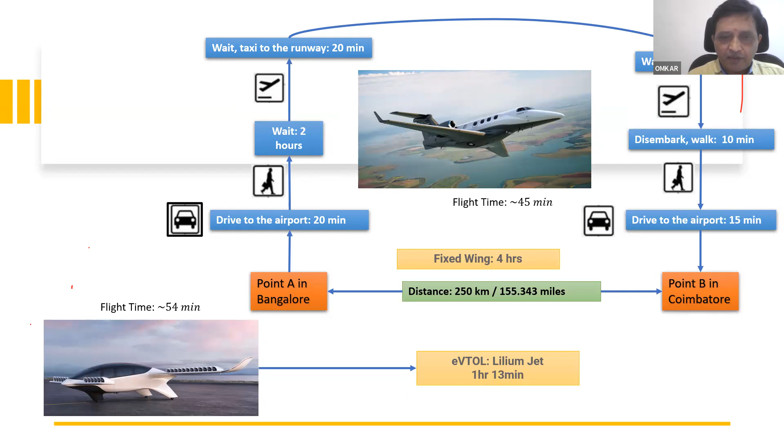Okay, no? 1 second. Yes. It is.

So if you look at the organ transplantation scenario in India, worldwide it is of course there, but even considering India, nearly 50,000 people are in need of heart transplant, about 3 lakh for kidney transplant, and more than 1 lakh waiting for liver and corneal transplants. One existing methodology is to create green corridors, which in the absence of any other alternate is the only way. They create these to cater to things in the golden hours.

It is very essential that you have a corridor like this, but considering the situations in the city, it is not always easy to do this, even creating green corridors. In fact, when we were discussing with one of the doctors, I forgot the name, but when they were carrying even in a road ambulance a heart transplant, the ambulance traveling in a green corridor with zero traffic hit against a divider, and they had a lot of problems. So anyway, road transport is really not all that easy.

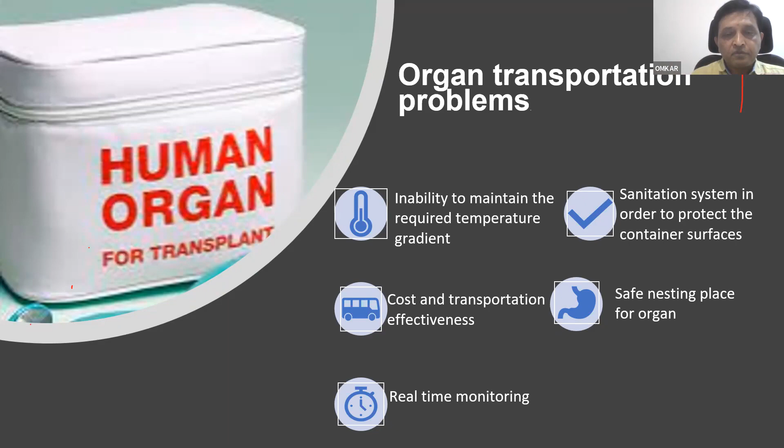So we studied some of the things - at 4 to 8 degrees, metabolism slows down but still persists. Below 2 degrees centigrade, it increases the risk of cold injury, causing protein mutations etc. So that is also a problem.

About 12 degrees centigrade is another type of problem where the metabolic demand for oxygen leads to some irreversible hypoxic injury, and it can impede the organ. So there is a need to maintain the temperature between 4 to 8 degrees centigrade.

So we need to design such a chamber where we can maintain the temperature and monitor in real time. Which means when the eVTOL is going, let us say for 100 or 200 kilometers, we need to really look at how to have a continuous monitoring system.

So the maximum weight of this box would be something like about 20 kgs, including the organ, be it liver or heart generally. This means that your eVTOL payload should be about 20 kg plus maybe other things like a camera etc. So about 25 kg payload.

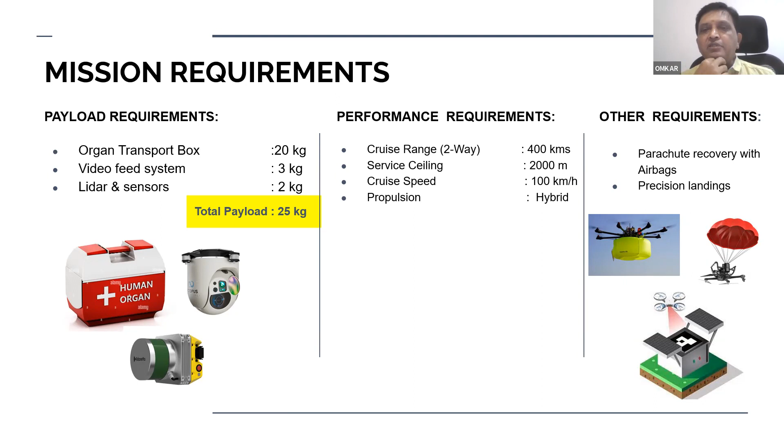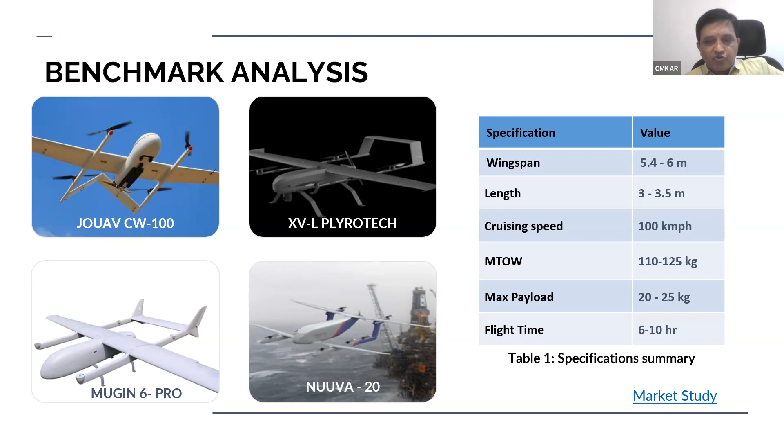So we started with some benchmark analysis for this kind of payload and this category of VTOL. We studied various designs - representatively we have put 4 different configurations that are considered. The right side table gives us the specification summary - wingspan approximately ranging from about 5 to 6 meters, length about 3 to 3.5 meters, cruise speed of about 100 kmph, and MTOW of about 110 to 125, and similarly flight time. So this is our starting point.

Then the design methodology - first we went with the design requirements, then the mission profile and analysis, then configuration selection, then we went with the conceptual design, initial weight estimation considering the constraint analysis, then component sizing, and we did the low fidelity aerodynamics and performance calculations.

Then we did the detailed design and high fidelity aerodynamics, followed by stability and control analysis, structural analysis, and final weight estimation. Of course, we all know this is an iterative process. Once we converge, we create a prototype and take it to the manufacturing stage.

Looking at the conceptual design, we have design requirements based on mission performance, stability, etc. Then the primary VTOL configuration layout: we select the multi-rotor frame, class and type, wing configuration, tail configuration, propulsion type, generate views, and optimize the configuration. Once you do this iterative process, you get to the optimized configuration.

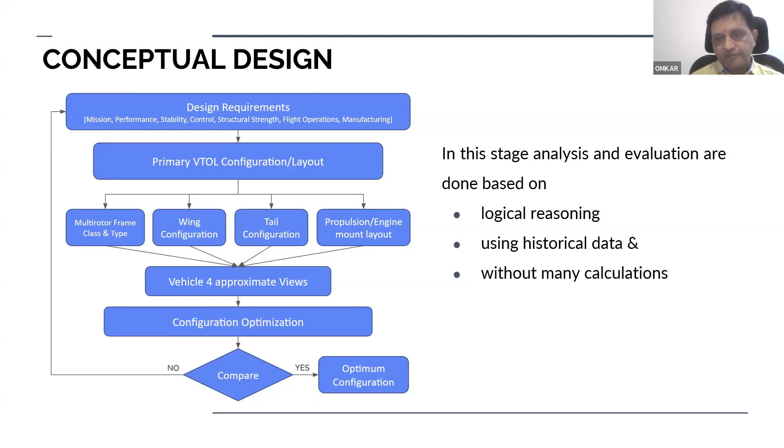So when we did that, this is what we get. As you can see, this is sort of an X configuration, with four rotors for vertical takeoff and lift, and a pusher configuration for lift and cruise.

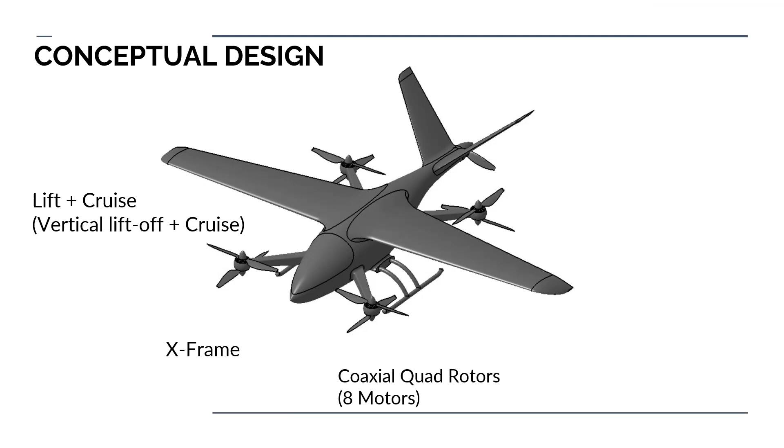Then we used the X frame and this coaxial eight, because we know that by using coaxial we lose easily about 25% of the performance, but we want to save since most of the time it's a cruise vehicle. We want to save on drag from the additional rotors, etc. Therefore, we stuck to this configuration.

If you look at the rotors, we used a high wing sailplane kind of design for better gliding abilities, and an IC engine pusher so that there is no interference from the main propeller onto any of these things.

You can see there is a staggered arrangement in the front two propellers versus the hind propellers. We did some studies to decide upon how much stagger and vertical differential we need to provide for these things.

We chose a standard V-tail design. This, especially in these kinds of VTOLs, will help us provide better directional stability. We have done a lot of parametric studies also on this V-tail angle, etc.

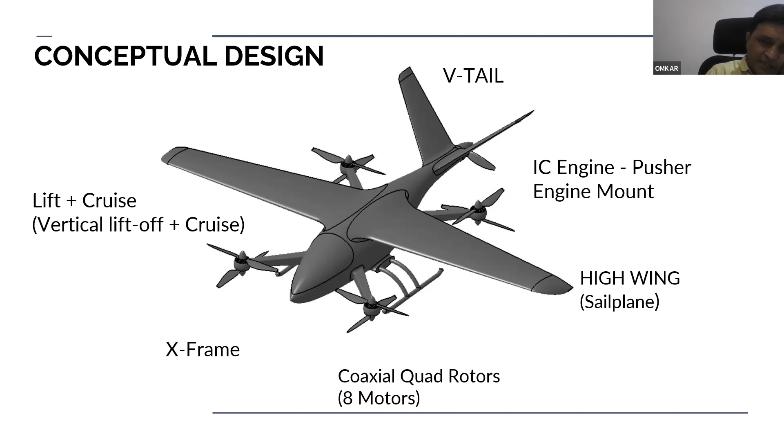Most of this cruise is handled by the gasoline engine or IC engine. For the preliminary design, I'll not spend much detail because we have a very learned audience. If it is too preliminary, please excuse.

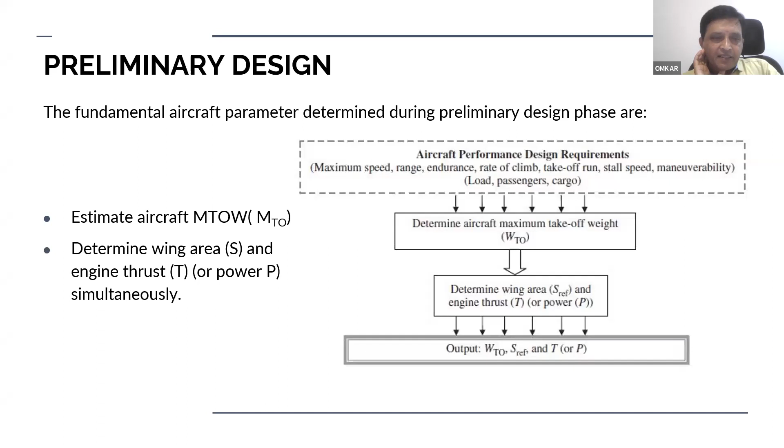Fundamentally, in the preliminary design phase, based on aircraft performance design requirements, we estimated the MTOW, maximum takeoff weight, determined the wing area, engine thrust, and power. So we did all that.

Then maximum takeoff weight estimation is done considering all the structural weight, subsystems, and avionics. Some of these things, of course, are taken from the design handbook as empirical calculations. That's how we arrived at the size.

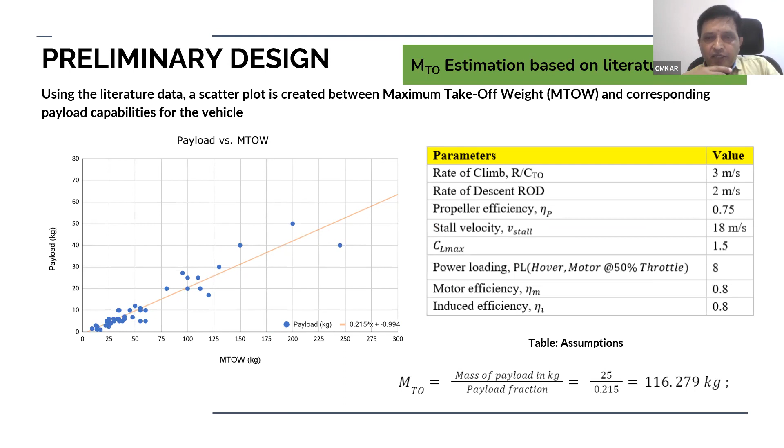So you can look at this scatter plot of MTOW against payload for various other configurations, and you see that regression line. We also fit into this, and that's how we chose the maximum takeoff weight to be around 120 kgs. You can see other values of rate of climb and descent in the table.

So this is how we started. Then battery weight estimation: we had to get to this, for takeoff, hover, transition from VTOL to forward, some forward to VTOL, then VTOL landing. These are computed, and you get the mass of the battery to be approximately 13 kgs.

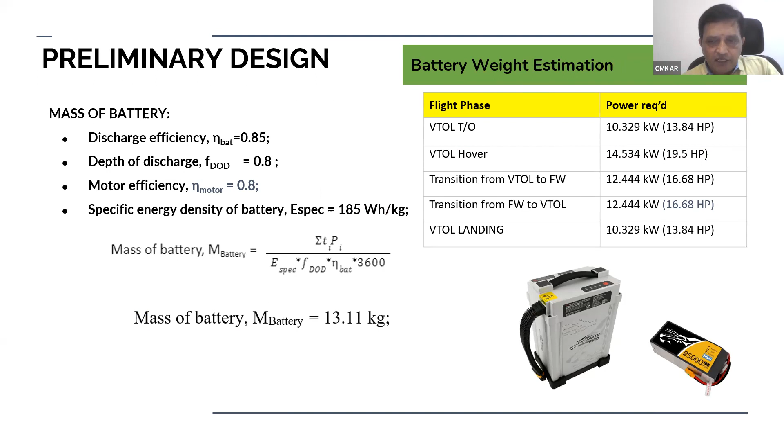Then for fuel weight estimation, we used the standard textbook algorithms or approach, and computed the fuel weight estimation. The mass comes to about 8.5 kgs.

The structural mass estimation we have done using standard design books. We referenced Gundlach, which says less than 20%, but that's for a fixed wing. Here we have other accessories like rotor mounts, etc., so we took it to be about 30% of MTOW.

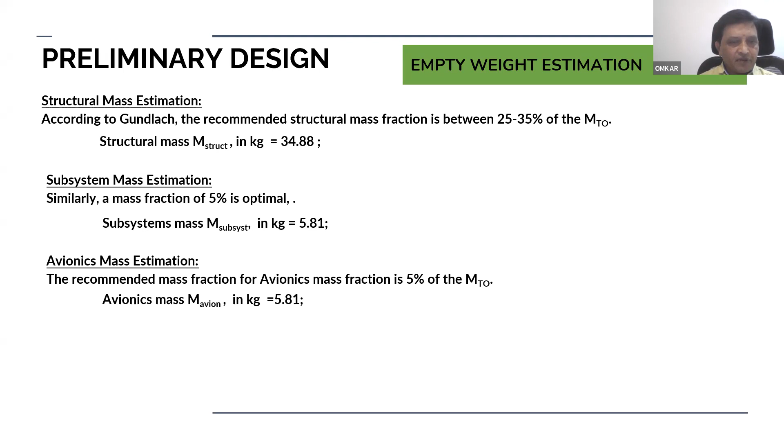So we get the structural mass, then the subsystem mass, then avionics mass. These are all standard things that we have taken.

When it comes to the propulsion system, the VTOL propulsion system uses motors which are T-Motor U-15 II, weighing about 1.74 kg, along with the electronic speed controller and matching propellers as given here. So we have the weight.

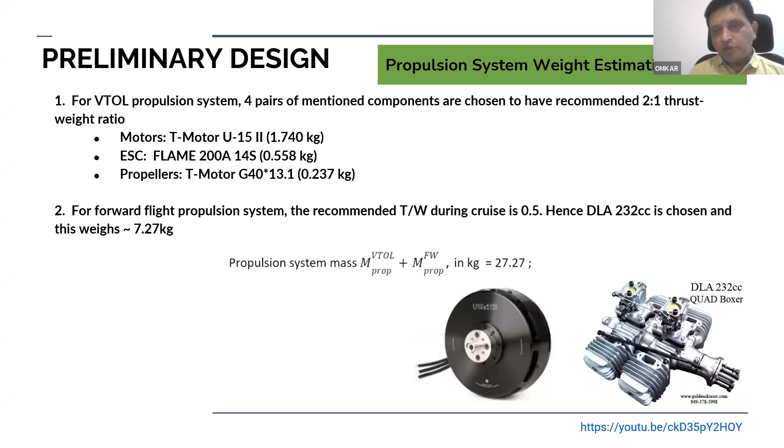Then for forward propulsion, since we need a thrust-to-weight ratio during cruise of about 0.5, we chose a DLA 232cc engine weighing about 7.27 kg. The propulsion system mass sums up to about 28 kgs approximately.

The total weight, now we compute from all we have done, and MTOW will be about 126 kgs, and whatever we started with our initial assumption, it matches.

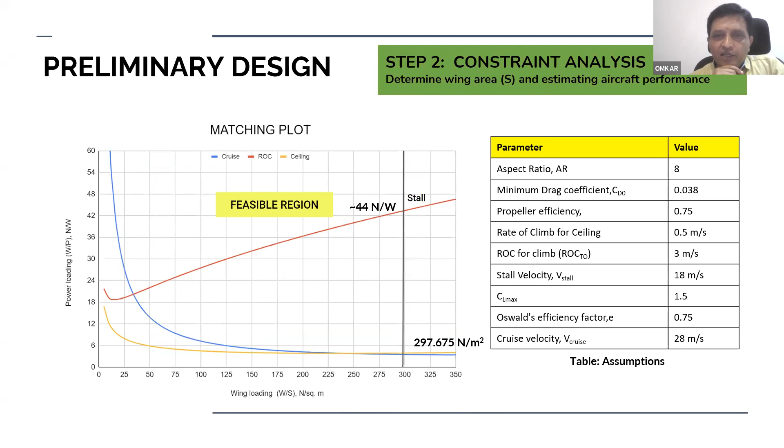So this is the constraint analysis to find out the feasible region of operation. As you can see, the power loading is about 44 newtons, and the wing loading is approximately 300 newton per meter square. On the right side, you also see some standard assumptions that we have made.

So this is the matching plot, and we arrive at the component sizing: cruise velocity of about 100 kilometer per hour, aspect ratio of 8, fuselage length to span ratio 0.6, fineness ratio about 4.5, and wing taper ratio also taken to be about 0.4.

So this is overall how the wing looks. There is a sweep, because the basic calculations are also given. Sweep is very slight, about 2 degrees, taper ratio of about 0.4.

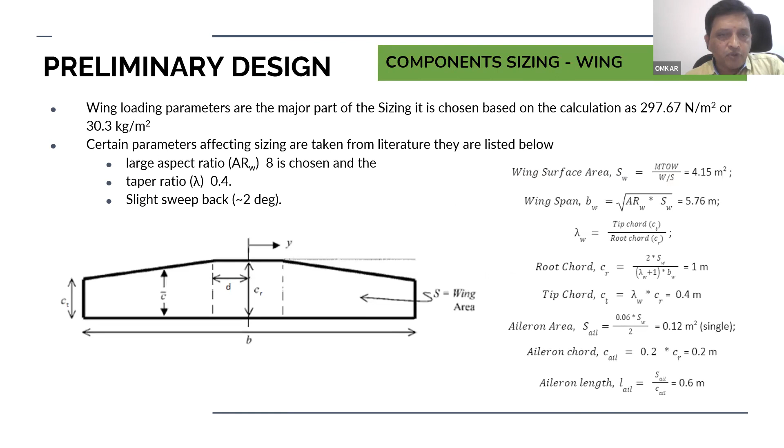And for the fuselage, from the literature, fuselage is 40 to 60% of the wingspan. So we started from there, and using the fineness ratio as shown in the last table, we arrive at fuselage length of about 3.46 meter and diameter about 0.77 meters.

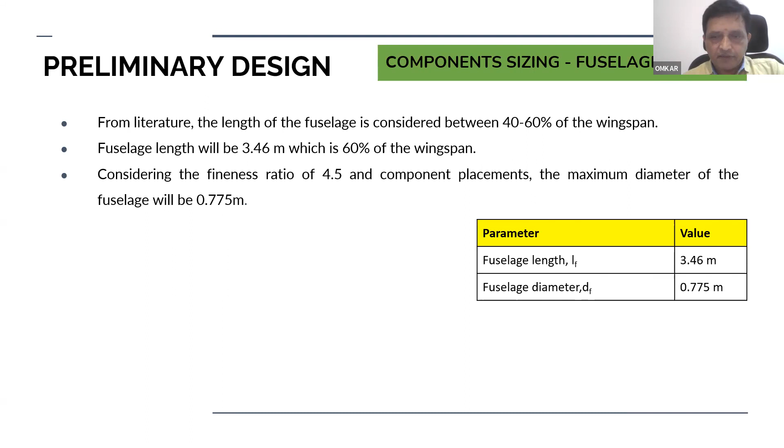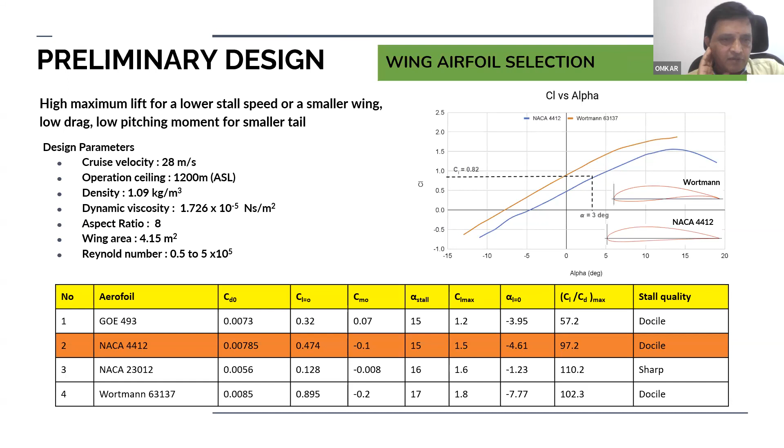Then the wing aerofoil selection - we studied, as any designer would do, a variety of aerofoils, and we converged to NACA 4412 because that satisfied all the requirements that we had. Its stall quality is also docile, not sharp, so that was another added advantage, and we decided to go with that aerofoil.

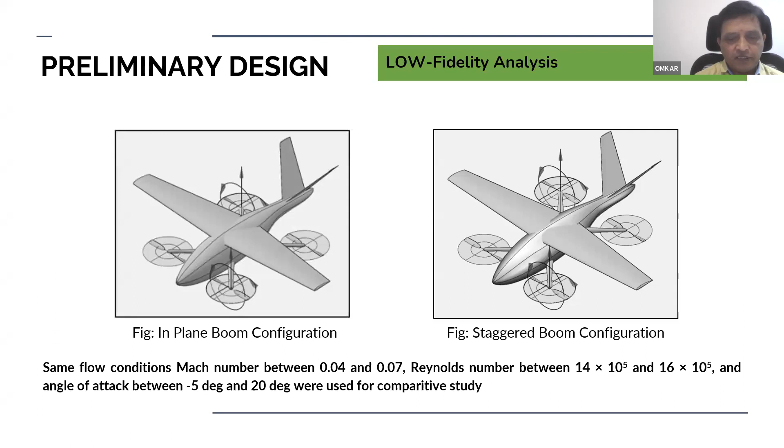As you can see in the in-plane left-hand side picture, there's strong interference between the front and rear rotors, whereas for the stagger, even at an angle of attack of about 5 degrees, 10 degrees, we have seen no appreciable interference. So we thought it is good to have staggered boom locations.

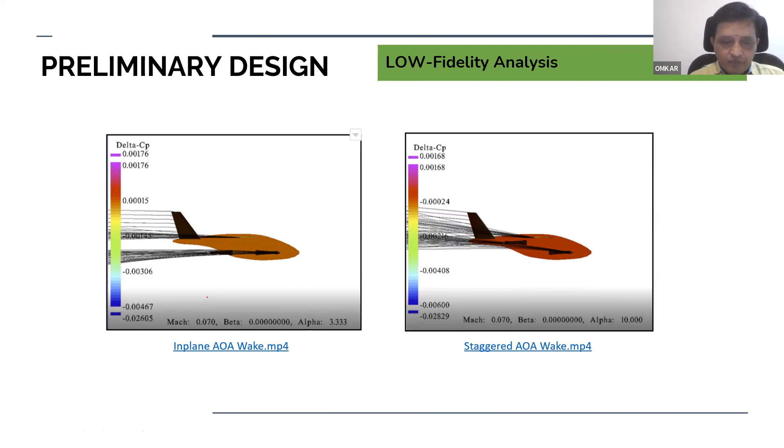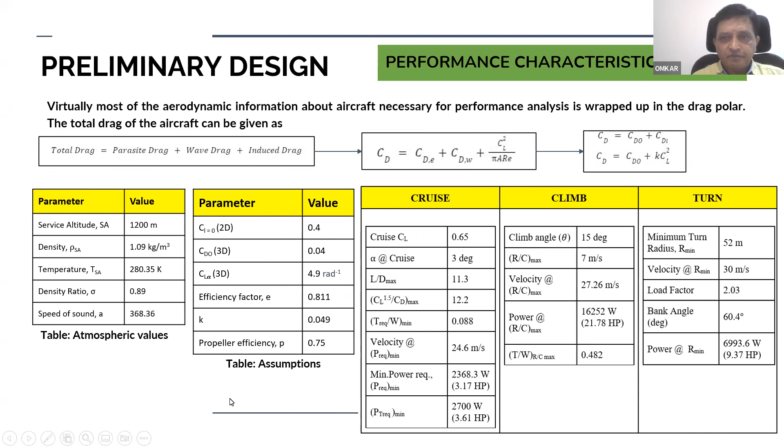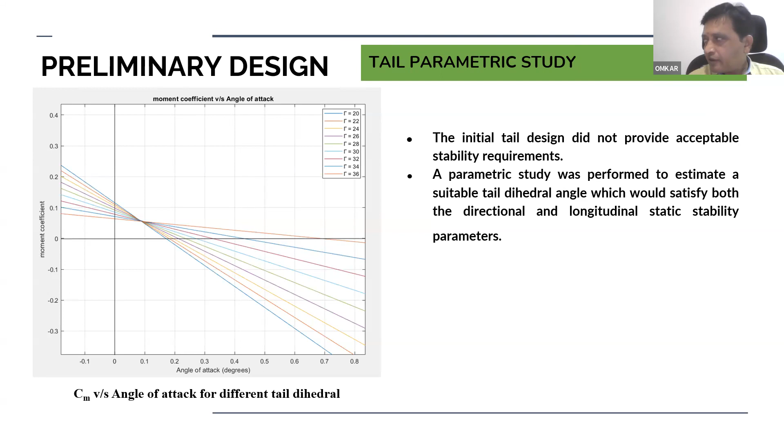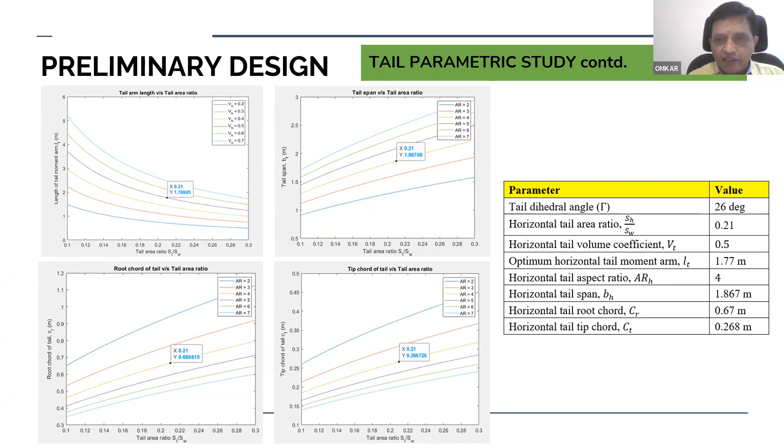So some more on the parametric studies - I will not go into the details of these things. We have done all these studies to arrive at the optimal configuration for the tail.

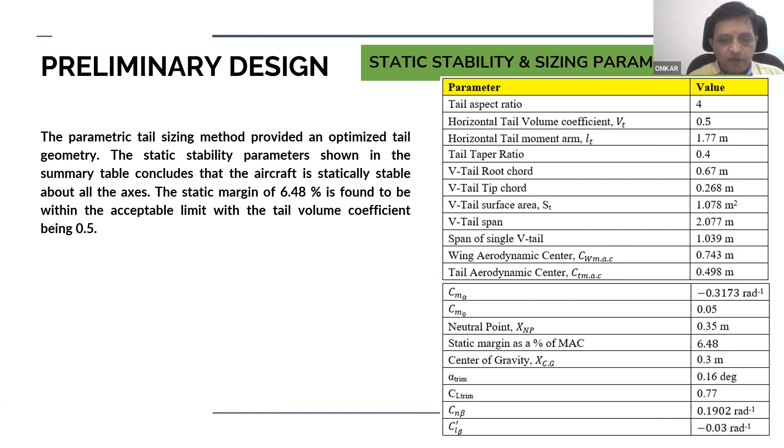Now coming to the propulsion system for the vertical flight, we chose T-motor, and total thrust is about 216 kg.

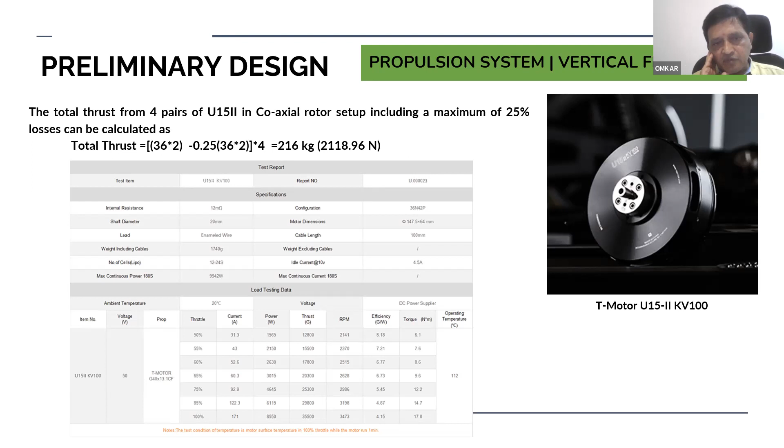Some of the other parameters are there in the table. Then when it comes to the forward flight, we have the...

IC, that is the SP275TS ROS engine. It's a two-cylinder gas engine, 275 cc. We did use that, and we are aware that there could be some issues with the vibrations. So we also designed a vibration isolator.

This isolator's weight is not much, it's about less than a kg.

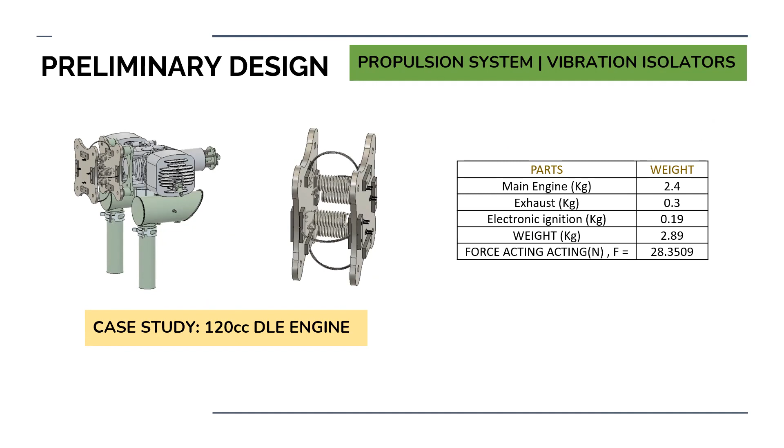So this isolator, we have done some studies. I don't have those results here, but it minimizes the vibrations to a great extent. This is essential for the type of problem we are trying to solve.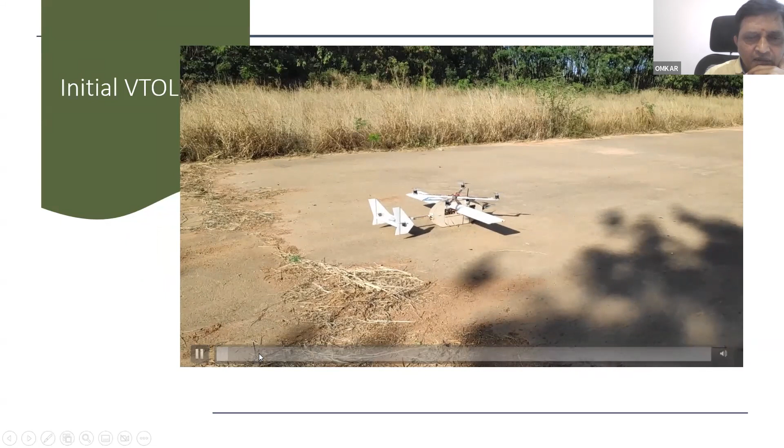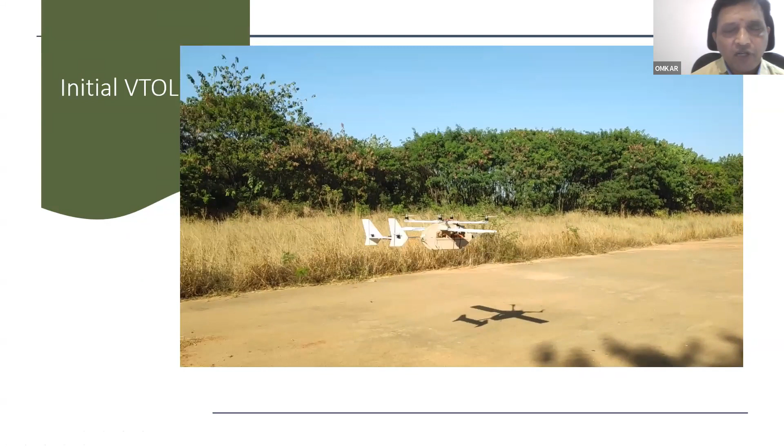This is our AAC airfield. Now the airfield we have almost lost, the airfield almost gone. So that's the transition.

Well, one of the advantages with this sort of vehicles is that the control things are quite easy and straightforward compared to the...

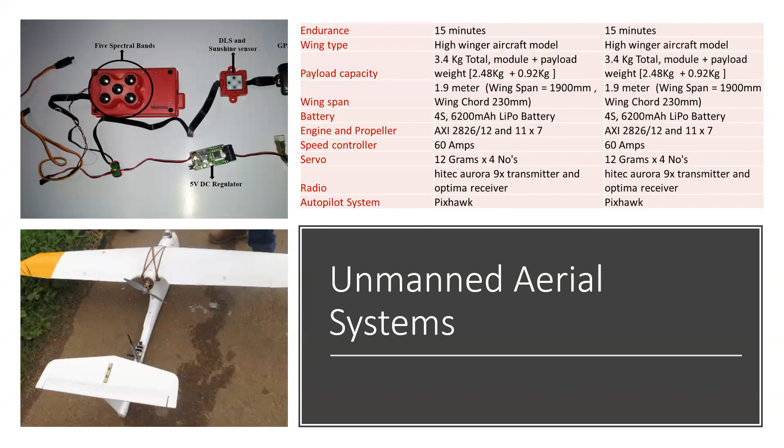Especially for paddy, health and yield. There is some background noise. Someone is, I think, he has to mute. Kindly mute your system.

Okay, so for agricultural applications, we have used the multispectral camera, which has 5 channels, and we have done this study in Kerala for more than 2,000 acres of paddy, all in the Palakkad area. You do the waypoint navigation, everything, do the flight plan, go there and fly, get the data. These are the 5 bands - you get RGB and NIR and red edge, and through that you can compute various indices.

One of the things that we did was to compute NDVI indices, and we recognized that NDVI in one place was less than 0.5, which means it's a diseased crop, and it was verified through ground truth to be so. And then we have done work on the yield prediction of tomatoes.

We used several techniques. First, we started with this image taken from a drone, and then we need to estimate the yield. Initially, we used self-organizing feature maps. Later, we developed into the object detection techniques of ML.

Now you see the tomato can be picked up as an object. The number of boxes is equal to the number of tomatoes, and the size of the box is proportional to the size of the tomato. You also have the RGB information, which means you can grade the tomato and calculate its yield.

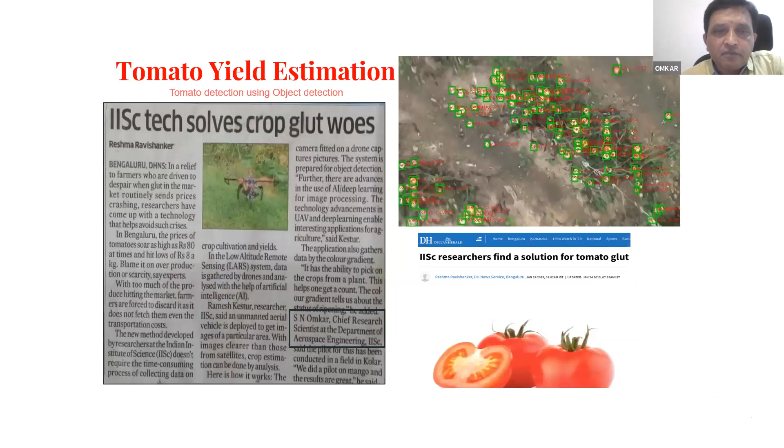And of course, the tree crown. If you want to extract the nature of the tree, what species it is, that can easily be done. We have used all types of data, this is IISc tree cover.

Then we have created our own mango network with a huge database, where just like tomato, we can pick up all the mangoes. You can see there are boxes around the mango in this picture.

Then we were the pioneers, myself and Professor K.P. Reddy, to use UAVs for afforestation. The conventional method we all know, so we actually did our first experiments about 7-8 years back in the Gauribidanur area, and we created an aircraft especially to carry seeds. It can carry about 10 kg of seeds with an appropriate dropping mechanism. You can also carry different varieties of seeds and drop them, whatever seed, wherever you want.

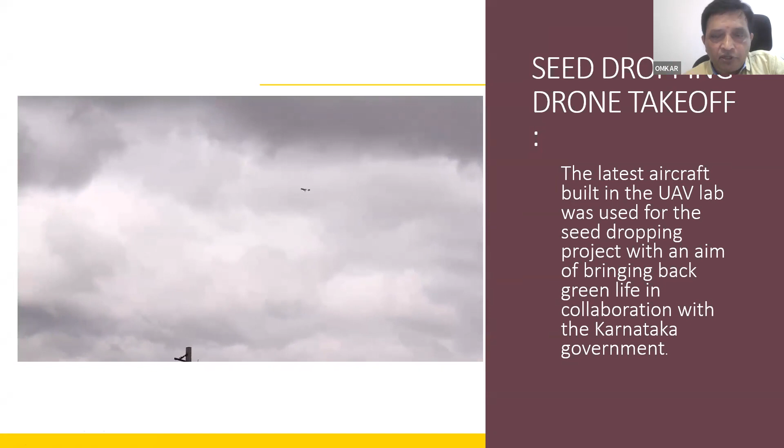The whole idea is that you can use waypoint navigation and fly in the same area, maybe once in 3 months or 6 months, so that you can know what is the impact of seed dropping on the local ecology.

Then we have done something on pomegranate, one of the recent studies we have done. You can compute the height and the canopy diameter, and through that you can compute the yield. We have compared this for a place near Chitradurga, and you can find out what is the average yield, etc.

Then one of the important works we have done is detection of violence using drone imagery. We presented this at the CVPR conference, a leading conference in image processing, and it gave us a lot of publicity too. The whole idea is that today any mob activities, wherever a huge mob is present, you can fly drones to monitor them.

Drone feeds can come in, but the whole point is when there is a violence activity or any sort of thing like protests or chain snatching, can you automatically detect and flag that at this lat-long location there is a problem. That's the whole idea. So we developed a three-step architecture using machine learning techniques.

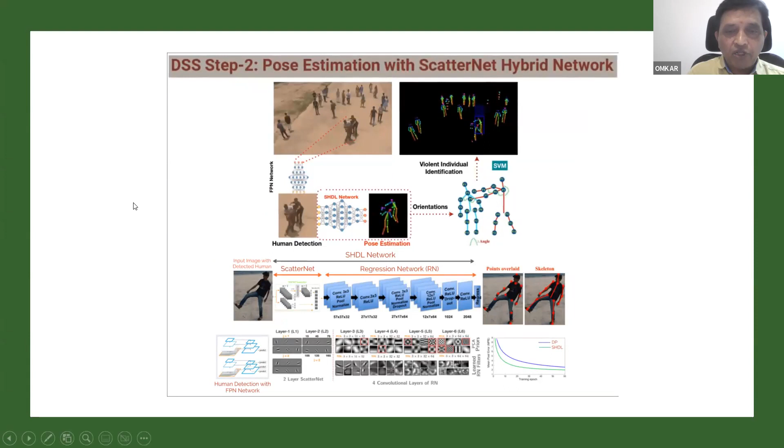So first is human detection, then pose estimation, how the people are engaged, what kind of pose they are in. That is the architecture you can see here, a regression network, which tells what kind of pose they are in. Then the orientation between the key points of whoever is engaged in the pose, so that you can classify and identify whether it is violent or not.

Multiple violence activities can also be identified in this algorithm. You can see multiple things being picked up in one go, and this can be flagged. This actually attracted the media also, and BBC interviewed us.

Just let me play it for a minute, because this is one of the small things that I use for boosting our lab. This is my student who is now in the US.

Then of course flood is a perennial problem we have, and it is important to detect the number of people who are trapped in any situation, including captives, because we have seen in many places, when rescue teams went recently, they took a boat which can carry 8 people, and when they went there, there were 80 people. So there was a lot of commotion about who has to get in, etc., and they could not plan properly.

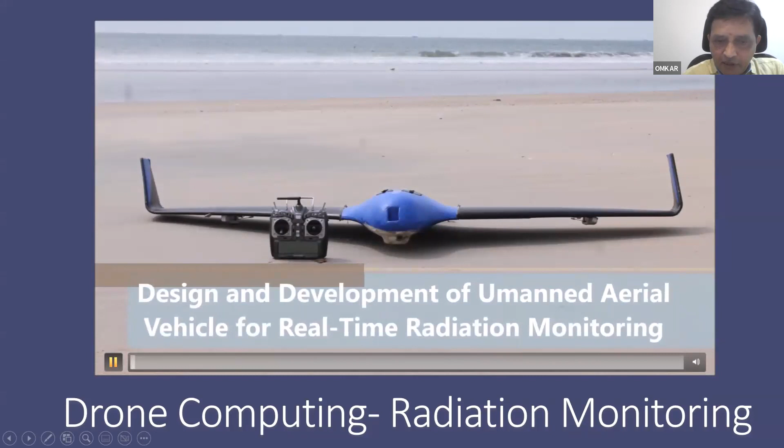So here is a small clip which will capture the work we have done with regard to radiation monitoring. These are some of the historical things that went wrong.

This should be over in another couple of minutes, so bear with me. Yes.

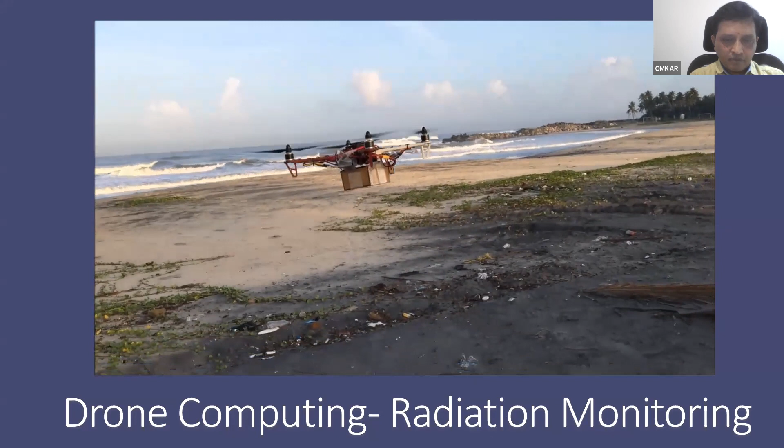So we went to Chavara Coast. First, we mounted this on a quadcopter because we need to look at how the instrument itself performs. This is the sensor board. So we did some variation in the altitude, etc., just to check and verify that we are able to get acceptable results.

Then we wanted to do the large area scanning, so there's the bungee launch. We went with the fixed wing architecture, and all around is the sea. You can see the waypoint navigation, where all it has to fly. And then when it lands, it has to be very smooth, it does a belly landing.

Yeah, so that's how we did it. And you get the real-time data, counts per minute and the lat-long locations. This is the onboard GoPro video. So you can get a heat map of how the radiation can go.

Yes, this is one of our experiences. Sometimes things can go wrong. When we were doing this, our team lost communication. So this is after we recovered. The post analysis, all around sea, they thought it must have dived into the sea. I'll show you the onboard video. We thought we had lost about 6 lakhs.

Kerala being the land of gods, God smiled on us. So here is the onboard video. We thought it had gone into water, but look, it just hit a coconut tree and nothing happened to our aircraft or the equipment. Some savior came and took it, and our students had to search for about 7 hours, and this was about 11 kilometers away. And that's how we actually recovered.

So now we have a system which can monitor the radiation levels.

Many other analytics we have done, but I thought I'll just include a few basic things. So this is what we see, that you have to use this on any kind of drone along with cloud and big data and AI to make it more meaningful. Jai Bharat, so I conclude.

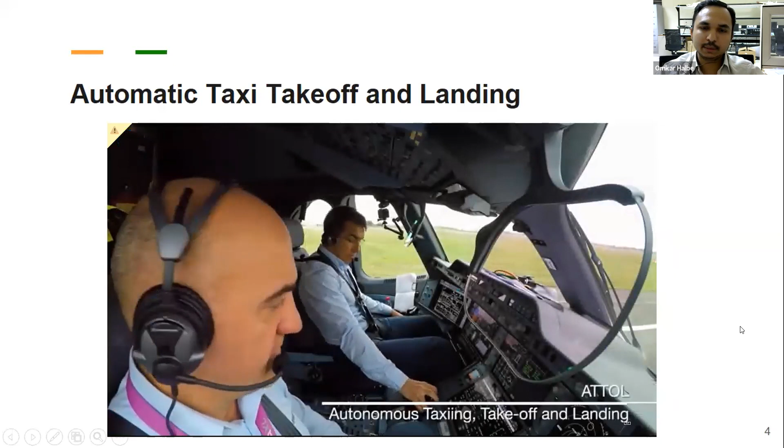So this was a recently concluded autonomous taxi, takeoff, and landing on an A350. What you will see is that there were some sensors mounted on the nose of the aircraft, whose function was to detect the runway center line and the edges of the runway, and that was then directly guiding the flight control computer.

So this is the so-called active hands-on, where the pilot is attentive hands-off, where the pilot is attentive and can take control at any point. But at this point, the pilot is actually completely monitoring the aircraft.

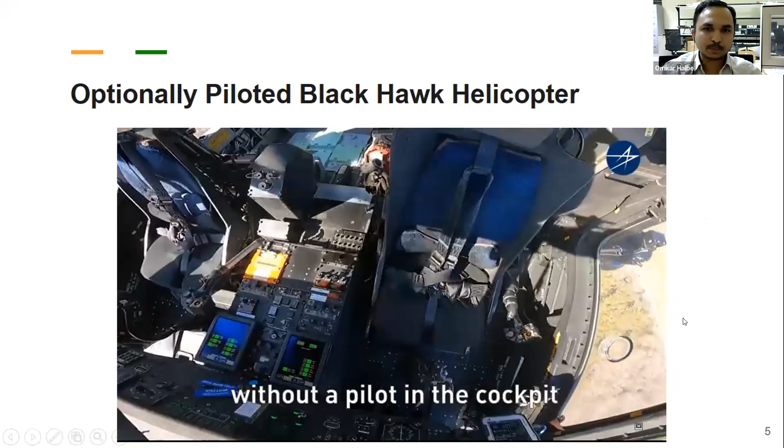The other one is also another example that was published very recently. So this is an unpiloted Sikorsky. This was actually flying without a pilot, but with a remote pilot. And it was claimed that it performed all kinds of maneuvers that are encountered in usual missions.

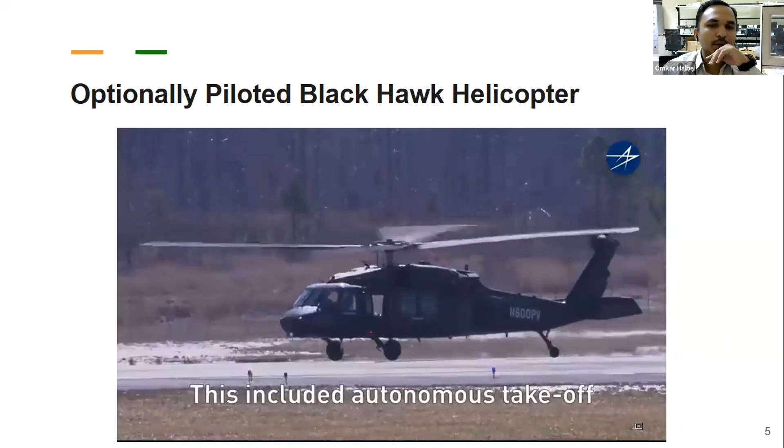So this is a remote station that is being piloted, and as you see, there is a takeoff which is without the pilot, and some additional features that were implemented.

So of course, these are efforts that have been going on for a long time, but only now we have been seeing this, and yet it is not actually something that is unpiloted, autonomous, self-driving. These are not yet available to users in industry.

So it's important to know what do we mean by autonomy. There are a lot of buzzwords like autonomous, self-driving, unmanned, but these are actually misnomers because everybody may have a different understanding. Autonomous for me might mean a different thing.

Essentially, automation is the use of electronics or mechanical devices, so essentially machines, to replace human labor. And that has been going on for a long time, at least since the advent of machines for agriculture in the old ages. Now we are only seeing that the machine is trying to do a lot more things.

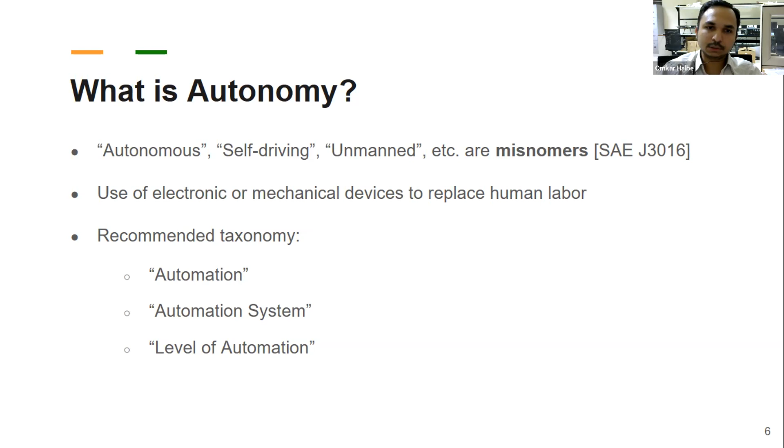So the recommended taxonomy, coming from the automotive industry, is to use the word automation system, and to speak about the level of automation - how far is an automation system controlling the vehicle.

So here is a brief timeline of how things have evolved over the decades in aviation. There was in the 1930s the invention of the gyroscope and the gyrostabilizer, and radio beacons that were providing direction information to the aircraft. Then in the 1940s, during the World War, the first autopilots were developed.

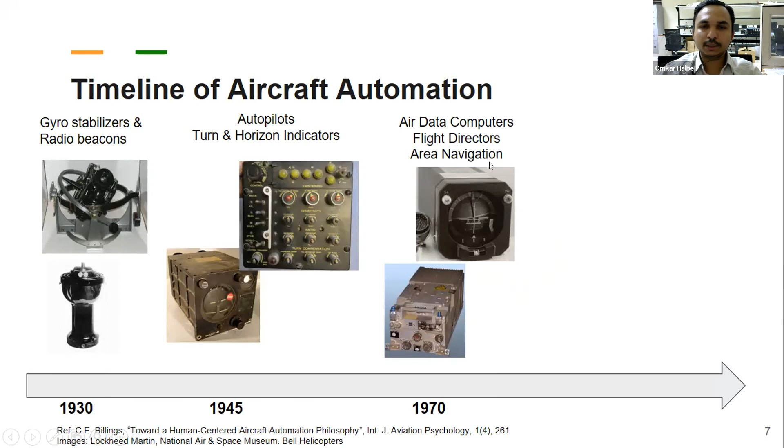Coming on into the 1970s, which was the dawn of digital computing, a lot of the data was then done by digital computers. So this was the time of air data computers, flight directors, area navigation to provide navigation features. And today we have the so-called glass cockpits, or the so-called integrated modular avionics.

So what it means is that all these instruments have been replaced by glass cockpits. So these are basically multifunction displays. The conventional controls have been replaced with side sticks.

This is the most recent Bell 525, which is the fly-by-wire helicopter. It's a medium heavy helicopter, and it was, as I understand, close to certification until last year.

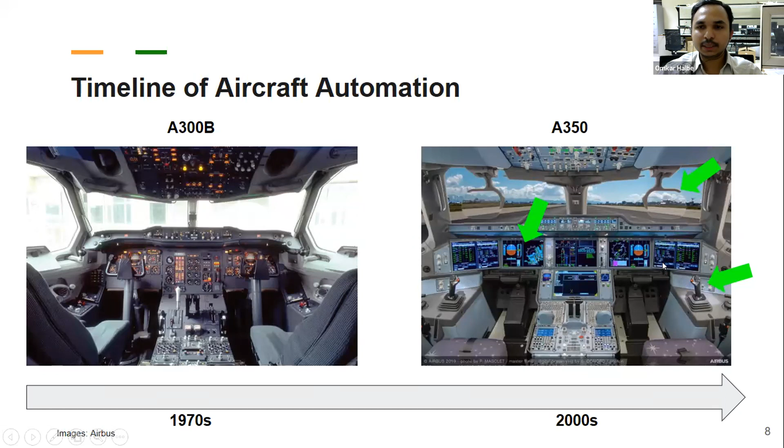Then the dials have been replaced with multifunction cockpits. And then there is this small piece here, glass, which is the head-up display that provides pilots a display on the head-up screen rather than having to look down. And that's really useful when landing and looking out at the same time.

In conventional VTOLs, there is already a high level of automation existing. That is enabled by the so-called avionics systems. Avionics stands for aviation electronics, a combination of these words.

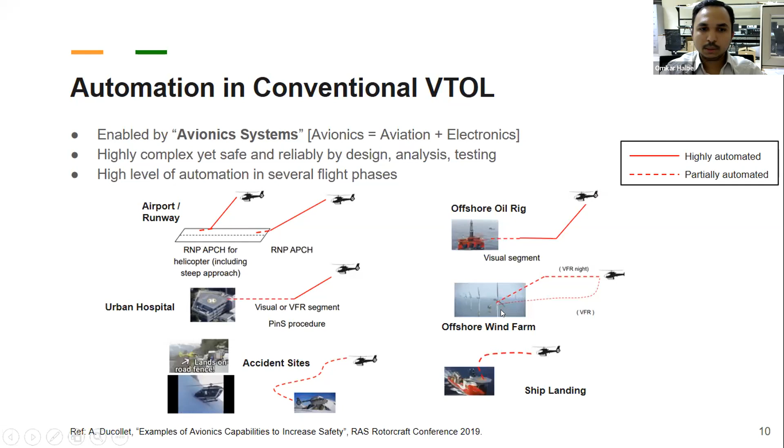A lot of the missions performed today are supported by automatic flight controls, guidance, and navigation. Here are a few missions performed worldwide by commercial helicopters. Some phases, as you've seen, are highly automated. Approach procedures, for example landing on an airport or runway, the pilot can already have 3D guidance to a certain height above ground. The last leg is flown manually, of course, with support of the autopilot. Likewise, other missions like landing on a hospital, picking up accident victims, landing on a moving ship, servicing offshore oil platforms and wind farms. So this already has a high level of automation.

When we speak about automation in VTOL, it's useful to speak in terms of levels of automation. Starting from level 0, where no automation exists, so the pilot is basically doing the entire flying. Level 1 speaks about task by task delegation, but this is limited to very small tasks, such as simply holding heading or holding height.

Level 2 is partial automation, where multiple tasks can be automated, meaning multiple axes of the aircraft can be automated. Typically in VTOL we speak about a 4-axis autopilot, which is controlling all 4 control channels.

Level 3 is highly automated, automating a complete segment or phase of the flight, such as climb phase, en route phase, or approach phase. Beyond this point, higher tasks are being done by the machine itself. Level 4 onwards is fully automated, and level 5 is autonomous, where all the tasks are basically being done by the machine itself.

It is important to also consider, when we speak about level of automation, in which flight phase are we talking about. These are different considerations that usually go into the brainstorming whenever an automation function has to be developed and certified. One is the flight phase - in which flight phase is the automation applicable. Then what tasks are being automated, whether it's basic piloting tasks, navigation, communication, or any other mission related tasks.

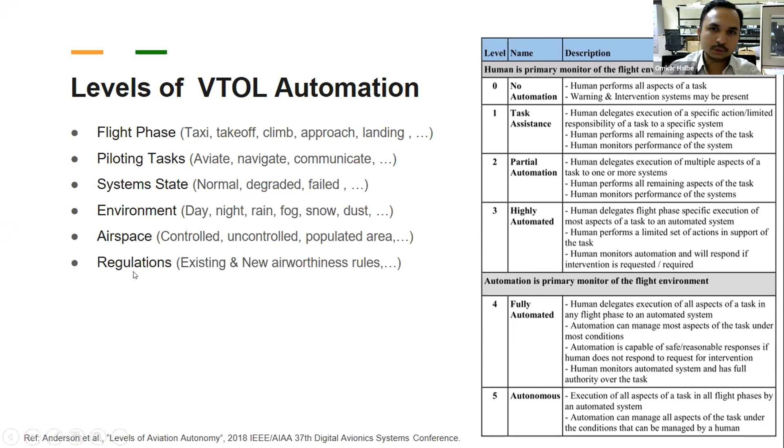Do we have existing regulations? The new functions - do they fit into the existing framework, or do new rules have to be generated? Again, legal aspects in case of incidents or accidents - who is liable? Because obviously machines cannot be held liable, so somebody has to take responsibility by law.

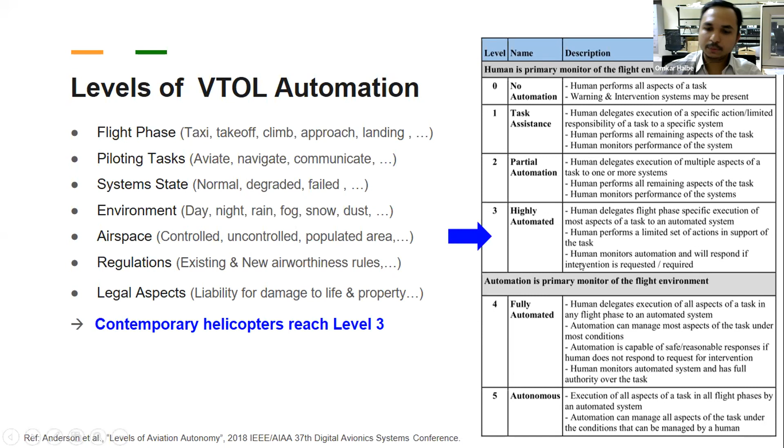It is safe to say that most conventional contemporary helicopters, even the conventional single main rotor design, can reach up to level 3, so certain flight phases can be fully automated. The challenge now is to reach level 5, which is the dream of most companies, as you see from the conventional ones to the drones, to the optionally piloted electric VTOLs. Everybody wants to have something that the machine does everything, but the challenge lies in ensuring that the design is safe and people can trust that.

That brings me to what are the requirements, globally speaking. There are 4 categories of VTOLs, including eVTOLs, which require some kind of automation. The first is the conventional, commercial and military helicopters, typically used for passenger or goods transportation - the HALs, helicopters, the Sikorsky's one, which is landing on a ship deck, and others used to ferry people; in this case, it's the maintenance.

So can such missions be automated? That's the first question in this. Then using the conventional helicopters to make them unpiloted - recall the video that we have just seen.

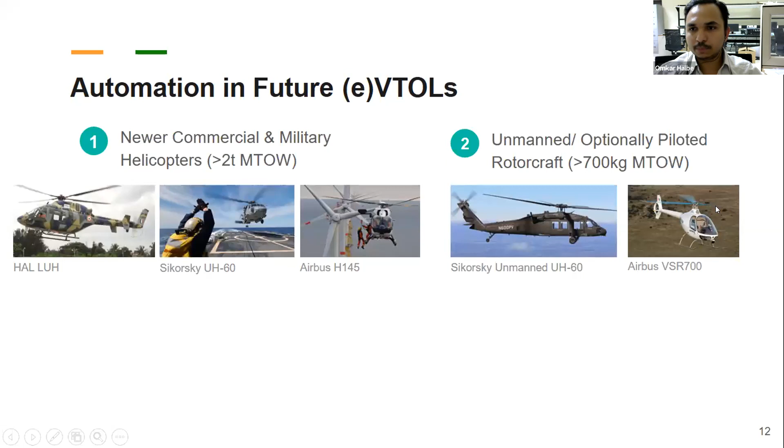And there are other platforms where 2-seater helicopters are being converted into optionally piloted vehicles. The third is a large category of small and commercial rotorcraft, for commercial and military use, and we have seen Professor Abhishek's presentation, where he has shown a wide variety of examples of this class of helicopters.

Right, and I've taken a picture from Professor Abhishek's own initiative. We here at NAL have also an octocopter. And the last category is these unconventional electrically powered configurations, which can range from tilt wings to tilt rotors to fixed quad rotors, a large diversity of configurations.

So of course, these are the requirements. Everybody wants to increase the level of automation, that is clear. Now the question is, how do we go about that and still make sure that the design is certifiable, because finally, if somebody has to operate this commercially, or somebody has to use it for a military operation, then there has to be some level of safety and reliability associated with each of these platforms.

So typically it's the civil aviation safety agencies responsible for commercial use, and the CEMILAC, or the military airworthiness agencies, for military aircraft. And it is imperative to pass through these agencies in order to get approvals for commercial usage or military usage.

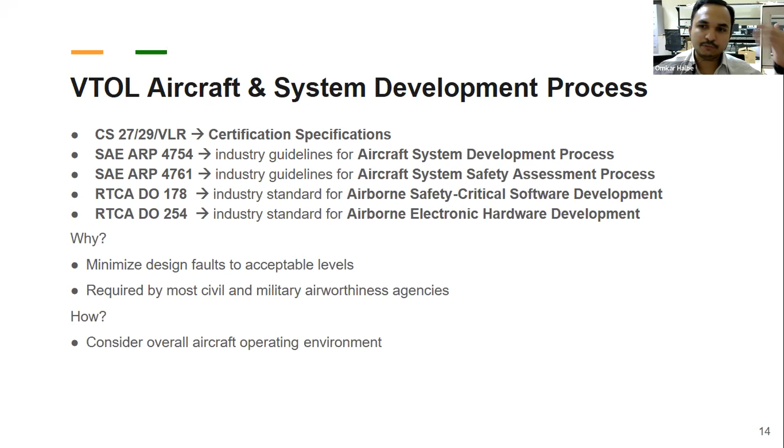So this is imperative. How does it go about? It considers the overall operating environment of the aircraft, in which environment it occurs. You might recall that in the previous slides, we have seen different considerations like flight phase, environments, and which are the tasks that are being automated. So these are considering the overall environment.

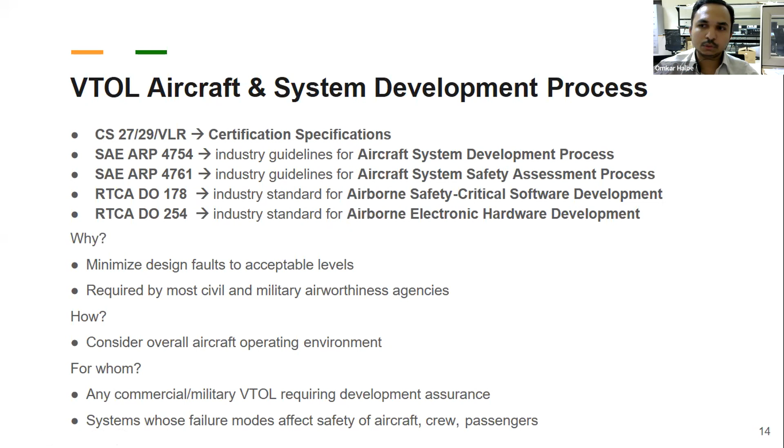And anybody intending to develop commercial or military VTOL, which requires some level of assurance to the end user or to the customer, these guidelines are most likely invoked. These are also used because it is especially applicable for systems whose failures may have severe or catastrophic effects on aircraft crew or passengers, meaning that if something fails, a human life is at stake.

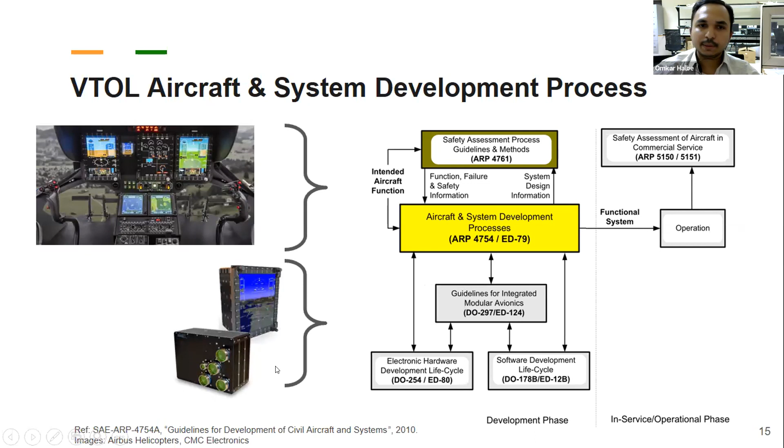When we zoom into one of these processes, I'll try to walk you through the different considerations when we do systems engineering. Here is the flow chart of the process. So there are some activities to be done in progress, and there are some integral processes.

So first we start with the concept, we do the function development, and then we allocate functions to systems. I'll go through these blocks one by one. And then there are some integral processes, which are integral to each of these blocks.

Then there is the overall planning, which would include management, requirements management plan, certification plan, safety assessment plan, systems engineering plan. These are documents which are established, giving an overview of how these activities have to be performed, the life cycle of all these activities. And it all ends with documenting each of these activities done throughout this process.

So an example of the concept phase is typically operational needs. Who are our customers? What are their needs? How much range do they want? What is the payload, or how many passengers do they want to fly? How high does it have to fly? In which environment do they want to operate?

Then based on that, what is the business case? What would the price be, the cost model? What are the services that will be provided after the aircraft is certified? So these are all the activities done in the concept phase, and of course all the aeromechanic configurations, benchmarking different configurations, as was cleverly shown by Professor Omkar just before. So all the pre-design and conceptual level activities happen at this stage.

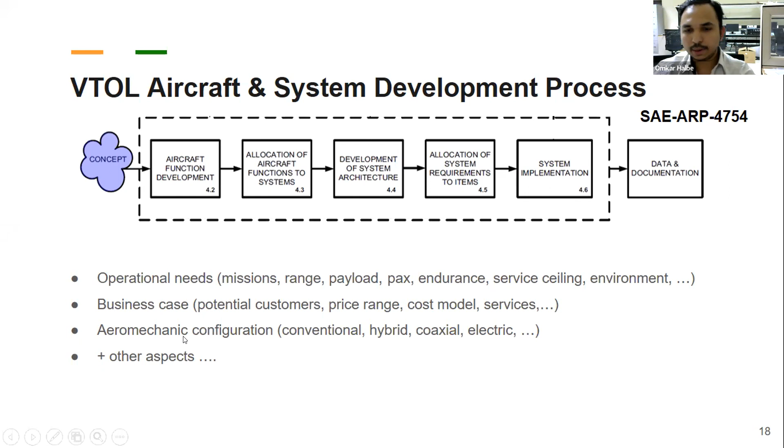Once we are sure what configuration, what the business case is, and the project has been sanctioned, we would go on to develop the high-level aircraft functions. Typically, if we speak about VTOL, it's going to be providing thrust. If it's a single main rotor, then provide anti-torque. And if it's about the piloting itself, then it's to determine position and orientation. So these are the high-level aircraft functions, the first level of breakdown for the aircraft.

As you see, it's not an exhaustive list. I have just stated things that are quite obvious here.

And then one would also break down these functions into sub-functions. For example, if we speak about controlling flight path, obviously we want to control an aircraft's flight path, and that can be done either manually or through automatic control. So provide automatic and manual control. If it's through automatic control, then we would have different kinds of automatic controls, or functions would be stability and control augmentation, trajectory control, and so on.

So these are just at the function level. These are not yet talking about what systems, what sensors. We are just seeing what function this aircraft has to fulfill. That's all at this stage.

So once we are reasonably sure what functions have to be fulfilled, and we break them down at a certain level and define function requirements, then we can start to allocate these functions to systems. So usually, we know that position and orientation is provided typically by a positioning system or an attitude and heading reference system. Thrust is usually, if it's a single main rotor, provided by the main rotor system, the main gearbox, the power plant, and so on. So these are all systems that will be installed on the aircraft, and here we are assigning that this system is performing that function, or that system is providing that function. That's the level of allocation we are talking about.

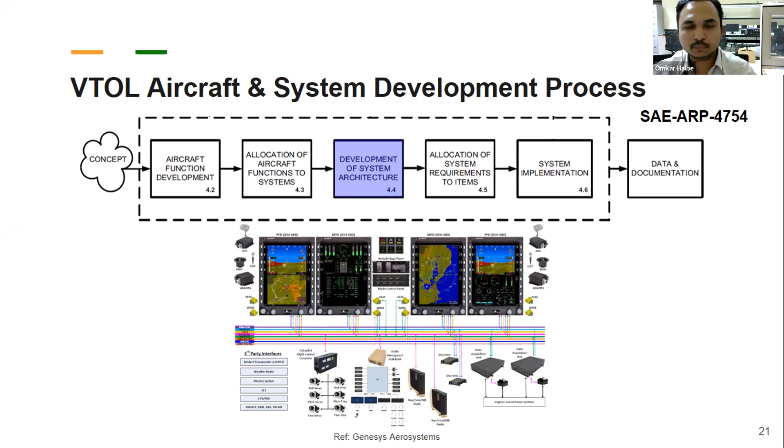So once that is done, we can also go down to small equipment level and try to allocate requirements to items. Here items are hardware items or software items. An example is taken for the aircraft management computer, which is the central computer of an aircraft that provides flight control, guidance, does sensor fusion, can do engine management, vehicle management.

And there is a constant level of traceability from high level to lower level. Finally, when everybody is satisfied that the requirements are correct, concise, well documented, and traced, we start to implement these functions, and each single item would be developed. Of course it's not everything done by one person, but a whole ecosystem doing all that. Everything has to be documented: how it is designed, the design has to be documented, the whole tests and everything. This doesn't speak of the test itself, but the whole process has to be documented. So that's a little bit about the design itself.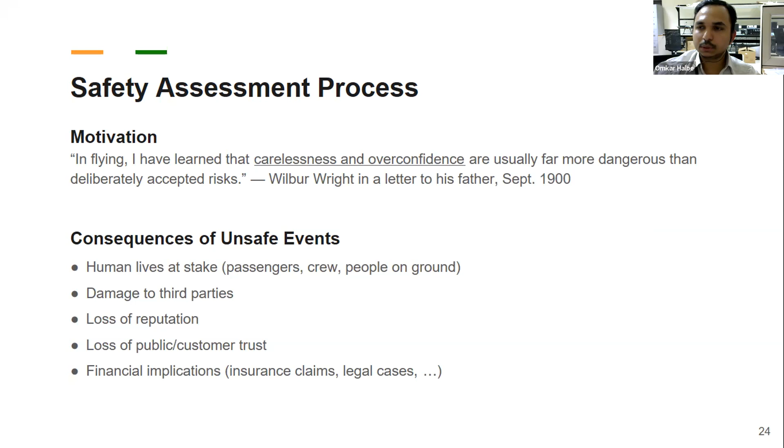Again, the point is that no system is ever 100% safe. It's always a question of when it fails and how it will fail, and that's the whole point. We have to understand when does a system fail, how will it fail, and what will be the effects of this failure on the aircraft and its occupants. That is the whole objective of this assessment process.

That will tell us that the aircraft and its systems perform their intended functions within a defined domain and for the specified limit. There is always a life limit and a defined domain, and as long as the operation is within this domain, it has to perform its intended function. Only then will the crew trust the systems, and only then can the crew be trained to handle anything that goes beyond this intended function.

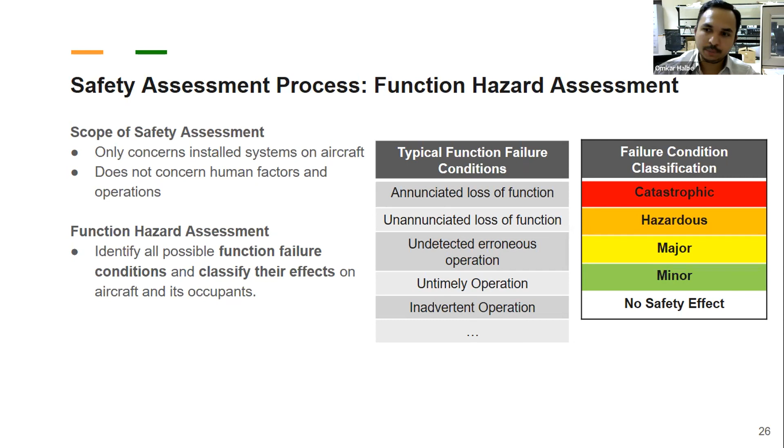There is an undetected erroneous operation, meaning the pilot doesn't know that it is erroneous - for example, a sensor giving wrong data. Untimely operation: for example, a landing gear that is programmed to deploy at a certain phase doesn't deploy on time, and it either deploys very early, which could lead to aerodynamic loads, or it is deployed too late, which could cause a hard landing.

Inadvertent operation, meaning a function that is not required to be in operation is actually operating. And then what are the effects of all of these conditions, whether it's going to have a catastrophic effect, hazardous effect, major, minor, or no safety effect.

Catastrophic is typically loss of human lives, damage to the complete aircraft hull. Hazardous means there is a serious risk of loss of life, but possibly that could be mitigated. Major means there is a high workload for the pilot, but there won't likely be any loss of life. Minor means there is a very minor increase in workload, and no safety effect means none of this - this failure has no safety effect on the aircraft.

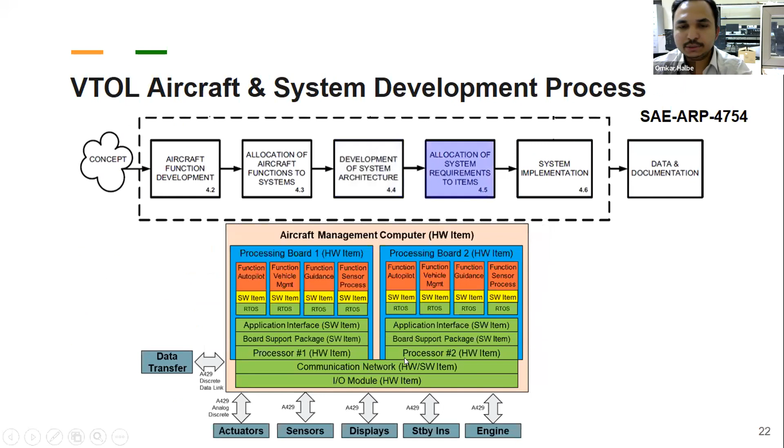Once this function hazard assessment is done, there is the so-called system safety assessment based on the architecture that we've seen in one of these slides - the system architecture. Each system has its reliability, safety and reliability data. Then there are all sorts of assessments done to prove that this architecture itself doesn't lead to a catastrophic event. That is applicable for all software items, hardware items, all systems in the architecture.

An example of an automatic flight control function: on one axis, you have the failure conditions, which are all possible conditions how a function might fail. The other axis is all the flight phases - different phases of flight. The third axis is the conditions in which this is operating, whether it is day, night, whether it is visual flying with the pilot's eyes out, or the pilot is relying on instruments. Each of these failure conditions is then assessed for each flight phase and each condition.

And then this is a classification of whether it is catastrophic or whether it is hazardous. So for example, if a flight control function does an erroneous operation which is not even shown to the pilot, and this is when the pilot is relying on the instruments, then there is a high likelihood that it is going to be a crash.

On the other hand, if there is a loss of function, meaning it is announced to the pilot that the FCC has failed, it is at a relatively high altitude, and it is during day, meaning the pilot still can look out and fly - in that case, possibly the hazard could be less. That is why it could be classified into a hazardous condition.

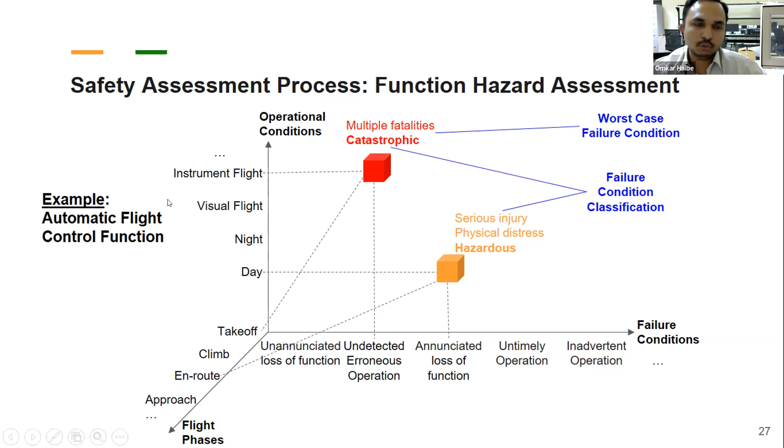So these are the classifications, and of course, in this case, the worst case is the catastrophic. That is why flight control functions usually have high quality requirements. These are typical tables that are worked out, and this is given in the guidelines of how this whole hazard assessment process has to be done.

Again, taking an example of an aircraft deceleration function - here its deceleration function is essentially provided by the spoilers on the wings, by the braking mechanism on the wheels.

So these are different systems which are contributing to this function. And this is a hazard, which is a wet runway, right? So this represents a hazard.

So we have the function. We define that there is a loss of deceleration capability. Then what are the different subcases? If it's an unannunciated loss, if it's an annunciated loss, and then what is the effect on the crew and occupants? And accordingly, there is a classification. And then if the classification turns out that the worst case is catastrophic, then obviously the function has to be developed to the highest level of assurance.

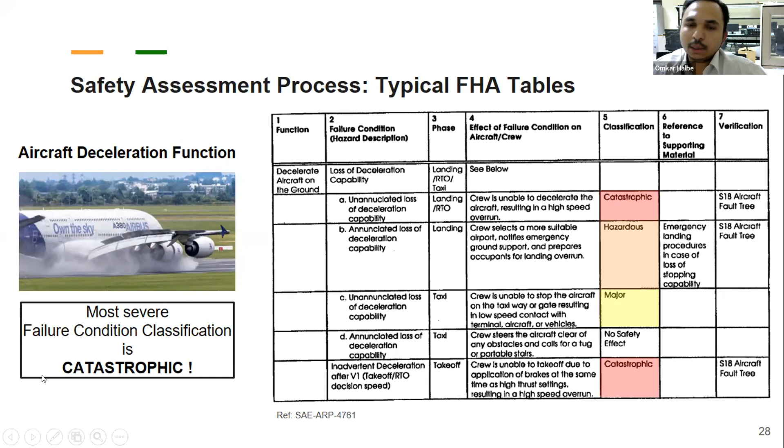Again, this is imposed by most certification agencies, where they say that any catastrophic condition must be extremely improbable. That means in quantitative terms, for large commercial aircraft, the manufacturer has to demonstrate that this condition will not occur more than 1 in 1 billion flight hours. So 10 to the -9 is 1 billion. That means practically during the whole life, no catastrophic condition may occur.

So that's the whole idea, that this systematic assessment provides guidelines on how the assessment has to be done, how the severity has to be assessed, what are the applicable probabilities for each of the functions, and accordingly, through different levels of assessment, these probabilities have to be proven through analysis, through testing, or through experience. A lot of different means of compliance are available, but these have to be shown through evidence.

Another thing to notice is that these probabilities might change for different levels of aircraft, because when we are speaking about a commercial aircraft that's usually carrying 150 or more passengers, the risk is much higher. But if it's for UAVs or light aircraft, these probabilities are usually much higher. So that all depends on what is the risk of catastrophic effects.

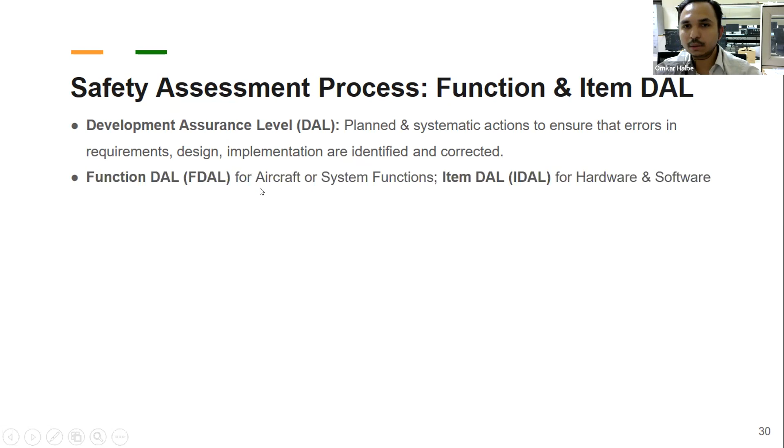Okay, so that brings us to each function having a development assurance level. So each function, based on the classification of what is the effect of its failure, has to be classified. And then it has to be developed according to the process, such that it fulfills those probabilities, the qualitative and quantitative criteria. So development assurance level is then allocated to each function. For the functions, it's a function DAL or FDAL, and for items, meaning hardware and software, it's IDAL.

So for example, a catastrophic function will be allocated FDAL A, and examples of these are for VTOL, stability augmentation, primary flight displays. So loss of these functions would then lead to catastrophic effects.

Likewise, different other functions would be allocated function DAL B if it's hazardous, major, minor, or no safety effect. And these are some examples: typically a weather radar or an obstacle warning function, which provides information to the pilot, would be somewhere around major. A moving map, which is showing a geographic view, would be minor. And then if it's just a basic data recording or an outside camera, which is used for gathering data, loss of that function has basically no safety effect.

So the thumb rule is that higher the criticality, higher is the function DAL, and accordingly more development efforts are required. Accordingly, more rigorous level of design and testing is required, and consequently it leads to a higher cost. So there has to be, again, a very good balance between what is the safety and what is the business behind. Some companies, if they go further into business cases and leave safety a bit behind, that's also not good, because safety is neglected. Some companies focus heavily on safety, then the aircraft becomes very expensive, and that also is not a good business case, right? So there has to be a very good balance of all these.

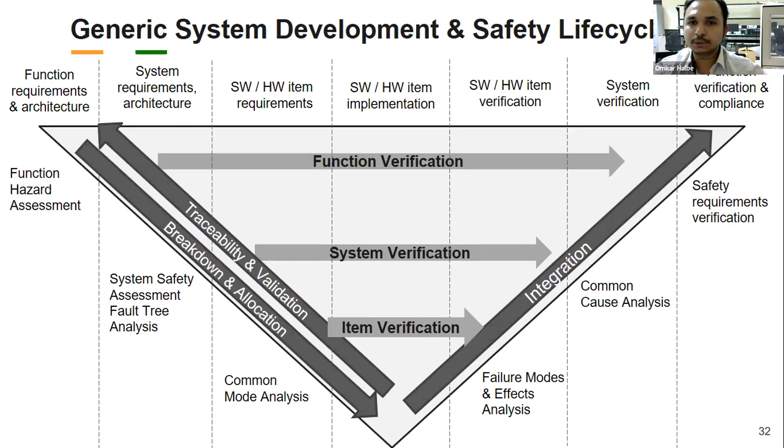So coming to safety related AI ML applications. Now AI ML is very popular. Everybody is looking to use it, and of course in safety critical applications there is also a strong push to have AI ML applications.

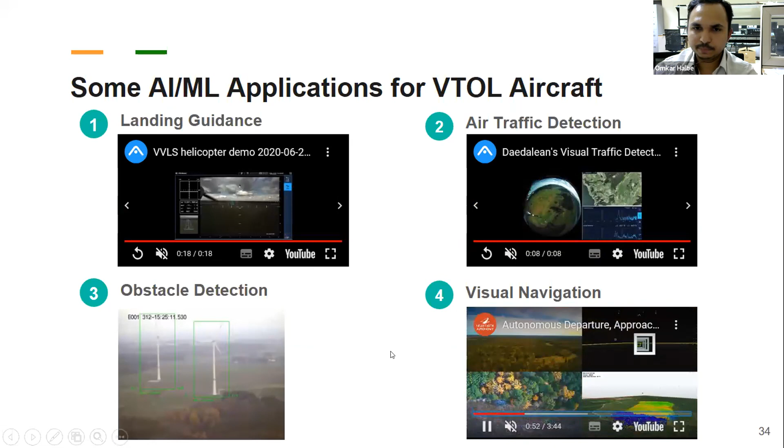So essentially, AI, as defined by EASA, which is the Aviation Safety Agency in Europe, is this so-called technology that tries to emulate human performance through model or data-driven approaches. A subfunction of that is machine learning, which provides algorithms using data-driven approaches.

Deep learning is again a subset of machine learning, using several layers of neural networks. So these are three levels of AI that are currently being discussed.

Level one is providing assistance to the human, and the human is still in charge of taking decisions. An example would be that this kind of information is provided to the pilot, that there is an obstacle, but the pilot would be responsible to maneuver and decide to fly or not, and if to fly, how to fly.

Level two is where there is collaboration, so some tasks could be done by the AI, some by the human. Level three is a more autonomous machine where the AI-based function can take all the decisions, but it could either be overridable, or in the last level, 3B, these decisions cannot even be overridden by the human.

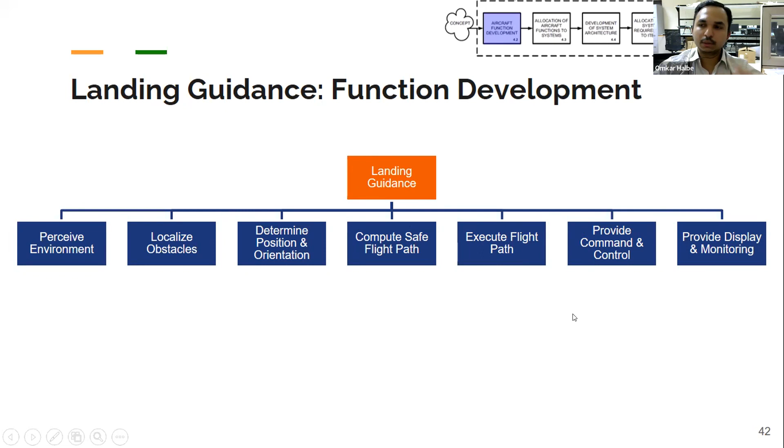Then usually we go to allocation, where we say the perceived environment is implemented by multiple sensors—optical system, radar sensor, LiDAR sensor. These multi-sensors can also provide redundancy.

Then for localized obstacles, we have a computer which fuses all this data and compares it with the database of satellite imagery. We could then provide position and orientation using standard sensors, then the navigation system computes the flight path, and the automatic flight control system executes the flight path.

So this is the allocation of functions to different systems. And then we have to develop an architecture.

That's the next step, where we think about how these different systems will be interconnected—what will be the logical data exchanged, and at a later stage, what are the wires, really going down to the level of wires. So that's the kind of system architecture. And then each of these blocks will have requirements that this system has to fulfill.

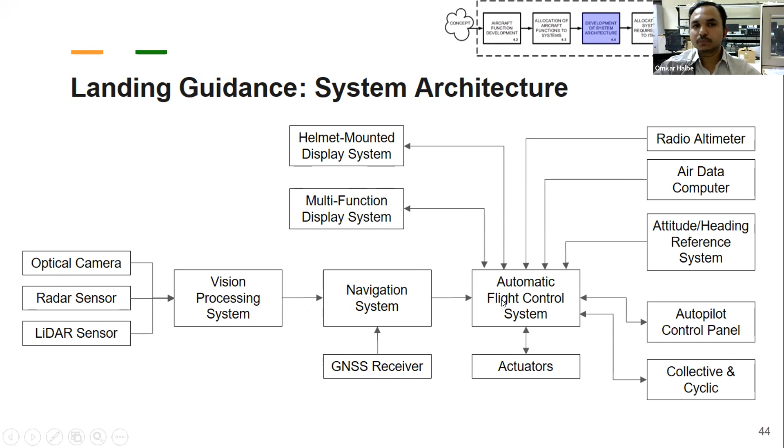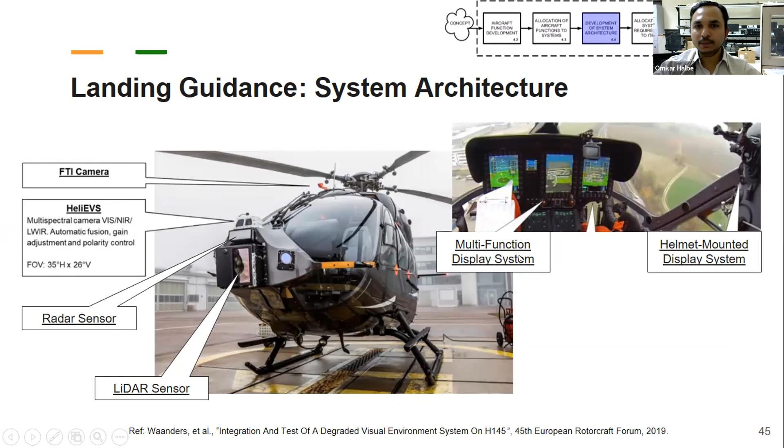Then, like we said, we have to assess what are the hazards. If the perceived environment function fails—if a single sensor fails, but we still have other sensors operating, and we're during the maneuvering phase, during day, and the crew or remote operator is still able to confirm the integrity—

then the classification could be minor. But if all sensors are failing and it's still day, and there is maybe another way that the pilot has to take manual control and land, but with a higher workload, that could be a major.

Then if it is wrong sensor data itself, and nobody knows that this is wrong, then obviously there is a high risk of collision, because the true data is not known, and that could be a hazardous event. So this kind of classification has to be done for each function—it's an extensive process.

But through this case study, I'm just trying to say there could be such a study performed, analyzing based on the requirements and going down to the level of architecture, and then doing the development, which might at some point be certifiable. So that's the whole point of this case study.

That's it, that is really great actually. That actually kind of nicely covers the whole gamut of setup required to go about solving this problem. Okay, so that's really nice. I think this is really enlightening for me, this entire presentation.

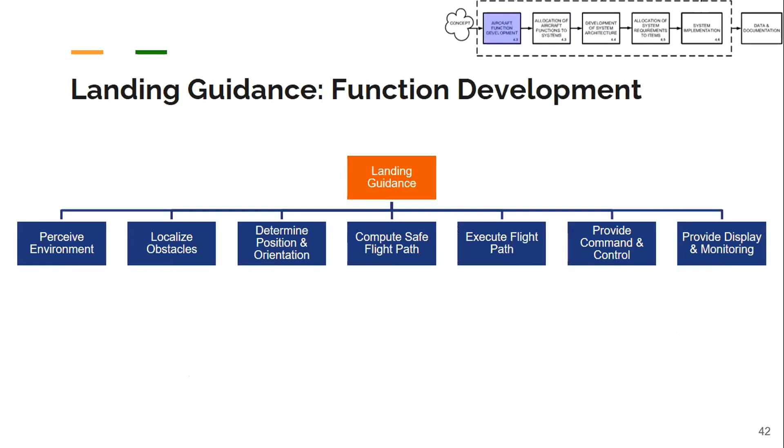This is Vijay Kumar here. Yes sir, this last example you gave, your presentation was very nice and very apt for the industry. The last part, 5 minutes, is very useful actually for the Himalayas. You have a small helicopter, or a simple tool, and it has to go from Leh to, let's say, Siachen, through those valleys. On either side you have mountains and valleys. This kind of algorithm you talked about is very useful - it has to be multi-sensor, different sensors, and vision based. You make a small mistake, you hit a mountain, that kind of thing. It's very useful, and thank you for that.

I think, sir, the algorithms themselves are not a problem anymore, because students are smart enough, and the panel, everybody here is well aware of the state of the art. What I'm trying to send as a message is that all this has to be put in the framework of systems engineering and follow a systematic, step-by-step approach, which will also help anyone developing such a system to bring it to market sooner rather than facing difficulties.

Such a mission, I have chosen it because it is relevant in our context today, where we really have a requirement to provide transportation, VTOL especially, in very confined areas like Siachen. The only thing is we have to make sure this development is done in a proper systematic approach, and then nothing is difficult. It's quite easy.